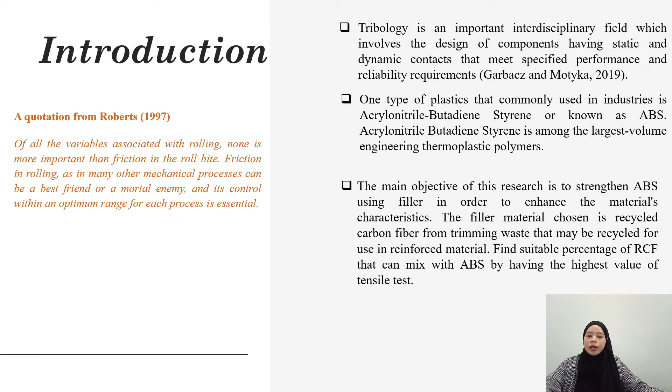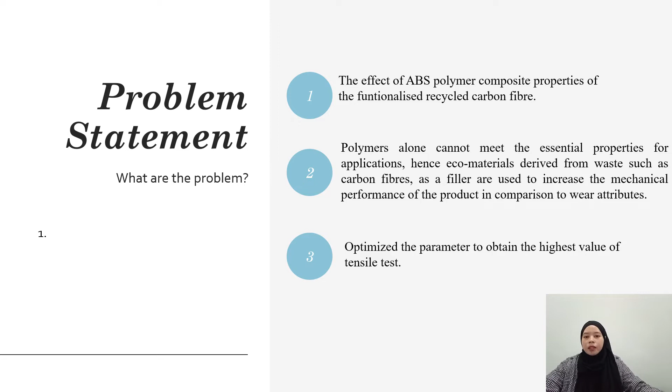The problem of this investigation is the effect on ABS polymer composite properties of the functionalized recycled carbon fiber. Neat polymer alone cannot meet the essential properties for applications. Hence, eco-material derived from waste such as carbon fiber as a filler is used to increase the mechanical performance of the product in comparison to wear attributes. And the last problem statement is to optimize the parameters to obtain the highest value of tensile test.

The objective of this investigation is to study the effect of filler loading on strength properties of ABS polymer composite. Second, to evaluate the effect of testing parameters on wear properties of eco-waste ABS polymer composite using pin on disc. And to correlate the effect of eco-waste loading with wear strength properties on morphology using scanning electron microscope.

And the scope of this study is focusing more on mechanical and tribological properties of ABS and recycled carbon fiber through single screw extrusion and hot press. The sample is a composite of ABS and recycled carbon fiber. The tensile test will be conducted using ASTM D2344 to measure the tensile strength. And the morphology or structure of ABS polymer composite will be analyzed under scanning electron microscopy.

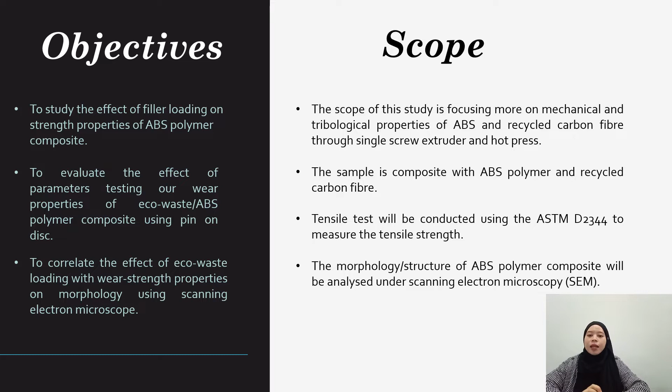Next, we move to the literature review that I used in this study. First, Jiang 2005 investigated the effect of strengthening ABS with calcium carbonate particles of micro and nano size. They concluded that the microcrystalline cellulose or ABS composite had a higher relative elastic modulus and lower relative tensile and impact strength when compared with ABS alone.

Next, according to Ben Difallah 2012, who investigated the mechanical and tribological properties of ABS filled with graphite powder, it was observed that increasing the graphite content in the ABS matrix led to a drastic decrease in tensile strength, while it produced a good enhancement of the tribological properties and friction coefficient. This was possibly because the graphite powder is a solid lubricant.

Colombo, Vergani, and Burman in 2012 used basalt fiber to strengthen the polymer matrix. They studied the effect of basalt fiber on the mechanical properties. The results show that high mechanical properties were achieved for both tensile and compressive behavior.

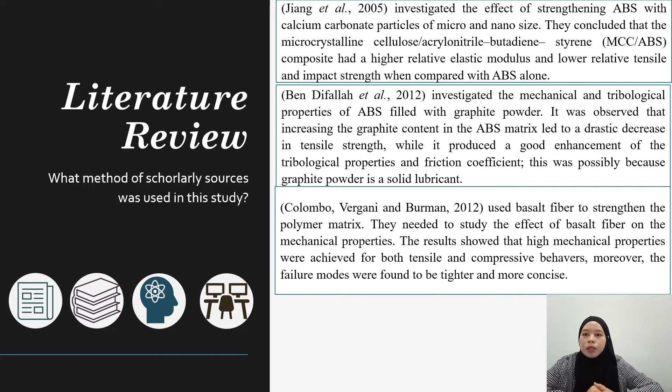Moreover, the failure modes were found to be tighter and more concise. Next, according to Abdelhaleem, 2016, they investigate the strength of ABS using basalt fiber. They use an injection molding machine to manufacture the basalt fiber and ABS composite with a varying percent of filler. And they conclude that both tensile strength and hardness improve with the increase of percent basalt fiber, while the impact strength is decreased.

And Sudeepan et al. 2015 have studied the effect of micro-sized zinc oxide content in a matrix of ABS polymer on the mechanical and tribological properties. It was concluded that the tensile and flexural modulus and the hardness generally increase up to 15% before decreasing again. They also report the enhancement of the wear and friction coefficient with the filler content.

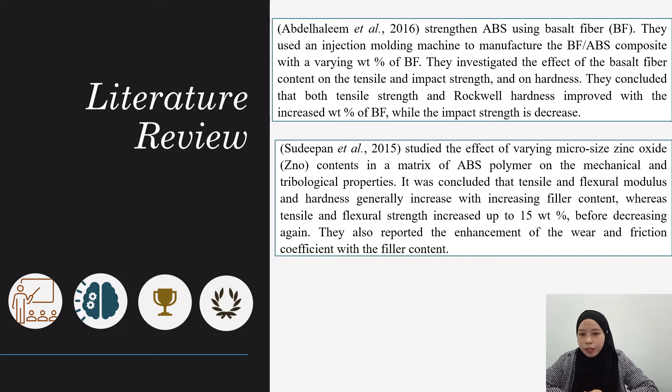Next, we will move to the material of ABS. ABS is an engineering thermoplastic which is amorphous with very good mechanical properties. And also ABS is easy to fabricate and it's lightweight. ABS has a good balance of properties: toughness, strength, and high quality surface. So the advantage of ABS is that this material combines the strength and rigidity of the acrylonitrile and styrene polymers with the toughness of the polybutadiene rubber.

Generally, ABS would have useful characteristics within a temperature range from -20 to 80 degrees Celsius, according to Goutham et al. 2018.

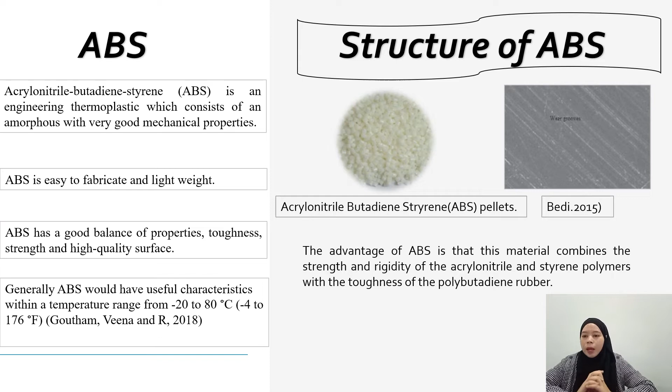For carbon fiber or recycled carbon fiber, Morton has shown that high modulus, high strength carbon fiber may generate reinforced polymer composites with strength and stiffness much higher than glass fiber composites. And carbon fibers are the most popular candidate for the development of structural and functional reinforced polymer composites because of their high surface to volume ratio, outstanding thermal, mechanical, and electrical properties, and also good dispersion in polymers.